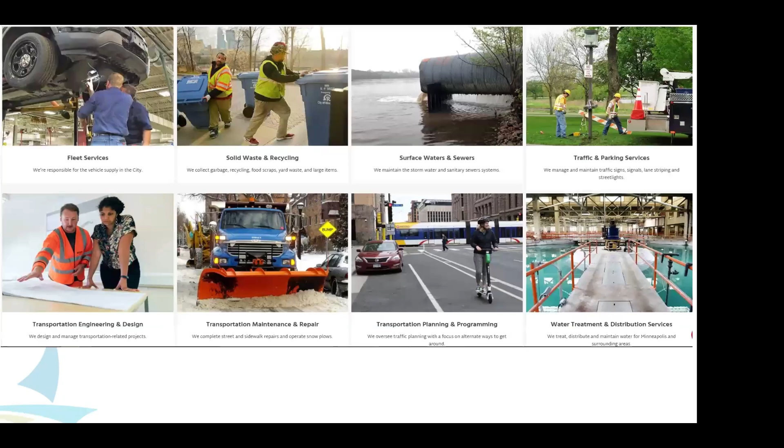Just a quick breakdown here visually of the 8 departments we have. I mentioned fleet services, so all the vehicles we need to do our job and provide service in the city - we have a group that maintains and purchases vehicles for us, that does all the oil changes and routine maintenance to make sure that we can operate.

Second, we have solid waste recycling. We want to keep our city clean, so we have trash services that the city provides for residents to pick up their garbage, and recycling as well.

We have surface water and sewers. I mentioned we have a lot of beautiful lakes and rivers here in the city, so we want to maintain our rivers by controlling the water when it rains, and make sure we clean it before it gets into our lakes and rivers.

Traffic and parking services - all the traffic signals, lighting, and all the parking signs out in the road, they maintain that.

Next is transportation engineering design. This is my division where I work. I am a design engineer, so I design the plans and also manage construction. This is where we do all the engineering in the public works department.

Transportation maintenance repair - this is one of the most important divisions. This is where they maintain the streets and all the infrastructure. When it snows - and Minneapolis, Minnesota is a very cold state, it snows half the year - they do all the snow plowing, street maintenance, street sweeping, and make sure the sidewalks are clear of snow and dirt.

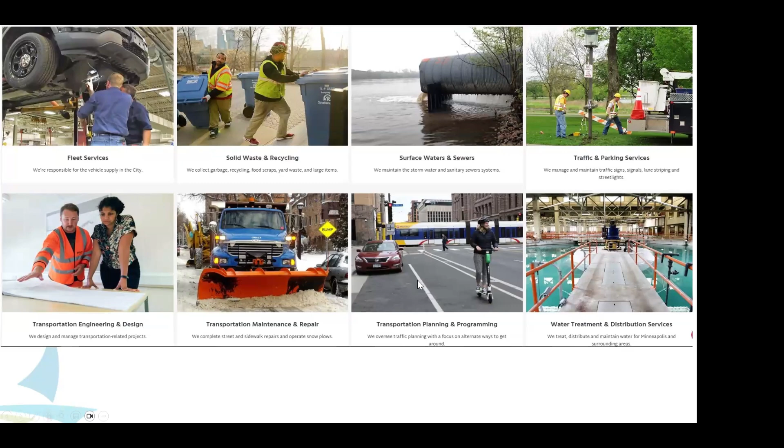And finally, water treatment. So our water department cleans all the drinking water in the city of Minneapolis. We have 2 treatment plants and a wastewater treatment plant as well in the city, where they clean the water and also distribute it throughout the city.

Okay, first important topic for any city or organization is a long-term vision. If you don't have a long-term vision, your city will not be successful. In Minneapolis, we have a lot of policy documents that we look into the future with to kind of see what the city will look like, or how we want the city to look in the future. And these policies help guide our planning, our design, everything at the city.

We look at these documents in terms of vision and how to implement change at the City of Minneapolis Public Works. For example, we have our Minneapolis 2040 plan. We're looking out - this was started back in 2020, so we had a 20-year plan into the future for how the city will look in terms of streets, transit, parks, all the different things you want to improve about the city, how beautiful it is, and infrastructure.

So we have all these guiding documents to help us with the vision and how to improve the city long term. For me in particular, I use the street design guide. This is very important in terms of how you design streets, and also the requirements you need for engineering wise when you do your street project. So these are all different documents we use. I can provide links after the meeting if you're interested to read some of them. There's a lot of information here, and we don't have time today to get through all the documents.

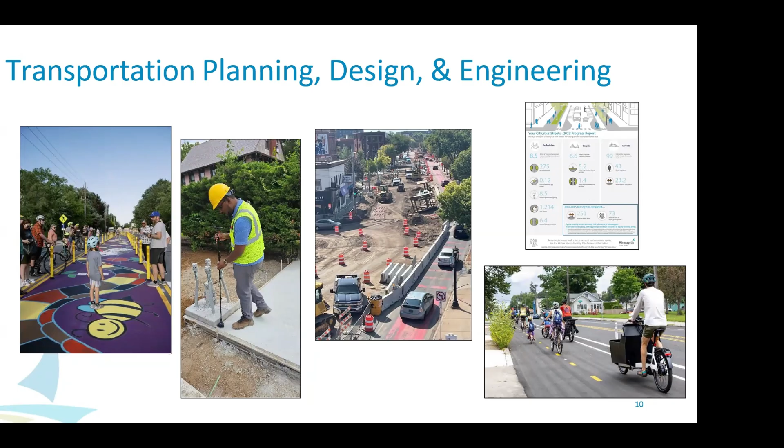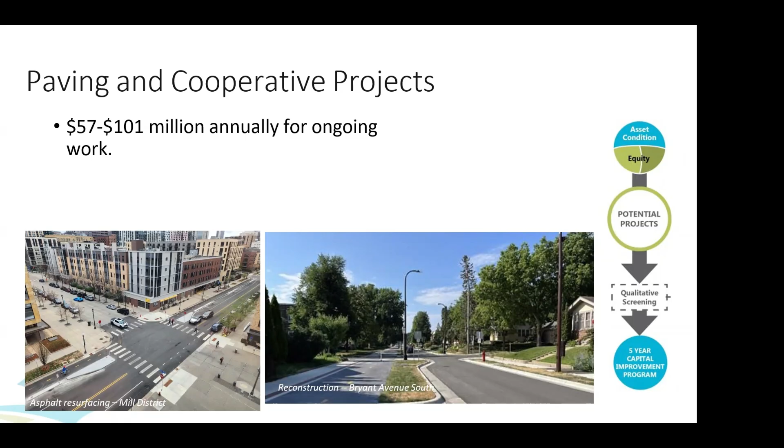So we have our paving project. My group does streets and roads, and every year we spend between $57 to $100 million in construction costs, building streets, sidewalks, and all different types of street projects.

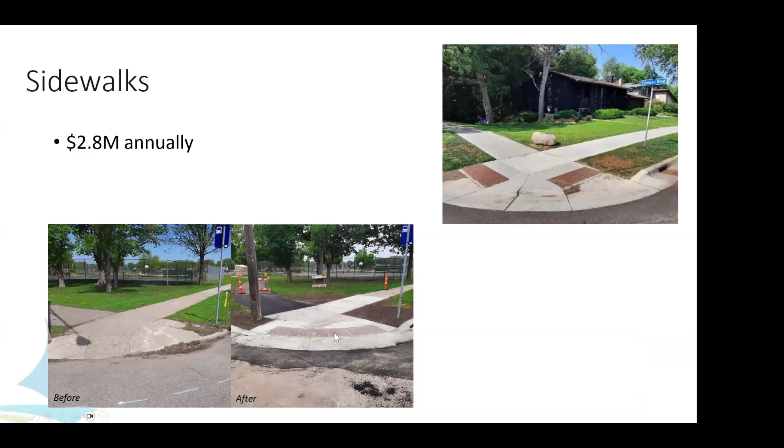And you can see the budget for the sidewalk for the next 5 years is pretty consistent, 2.8 million, for the next 5-6 years.

Bridges, we also have a bridge program. Minneapolis has 107 bridges that we maintain. So there's two things: we build new bridges, and we also do rehab, repairing existing bridges as well. If you add up the cost to build new bridges and maintain existing bridges, we're looking at almost $60 million every single year to maintain our bridges.

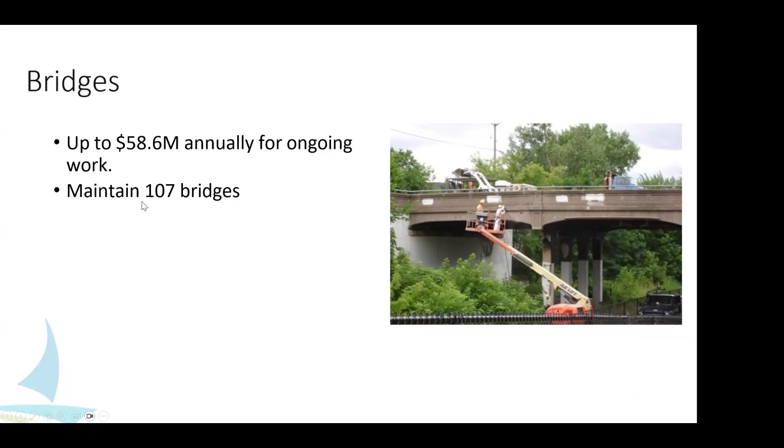Similar to the street program, we have a different type of bridge work we do every year, and we have a budget for each individual year. Let me go to the next slide here.

It depends on each year what's happening, so it's not always the same. Some years you might do more work, some years you do less work, based on the funding you have for that particular year.

Also, we have our traffic and street lighting program. This is very important - I mentioned we have 830 signals, you can see on the picture here in the city. We also have 50,000 lights that we maintain so people can walk and see when they're walking and driving along the city. That's a lot of infrastructure that we have to maintain every year.

We do a combination of putting new signals and new lights, also repairing existing lights as well. And that budget is roughly, depending on the year, $11 to $21 million every single year.

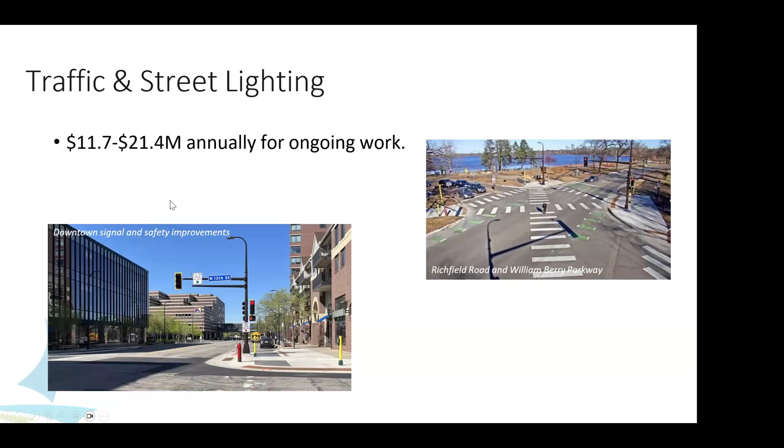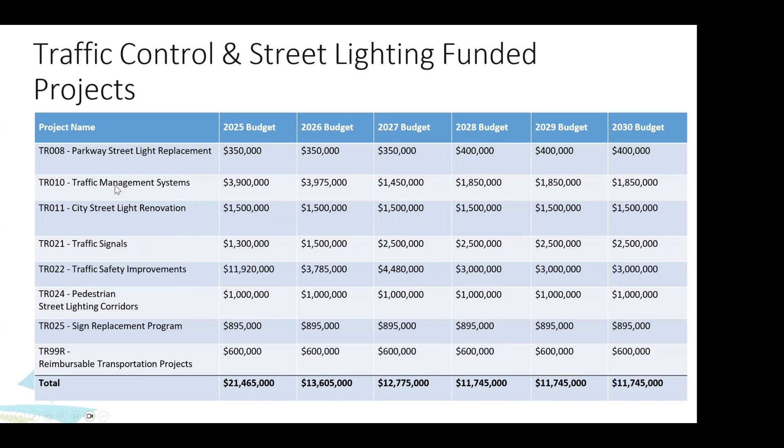Once again, same thing, we have a budget for our traffic and street lights. It goes from $21 million all the way to $12 million in the future. Everything is broken out - traffic signal, lights, traffic management systems - everything is organized and funded.

Next, I'll look into our utilities. Before I mentioned streets, bridges and traffic lights - now this is our underground systems, which is very important. We have 3 utilities at the City of Minneapolis that we maintain: sanitary, storm, and water.

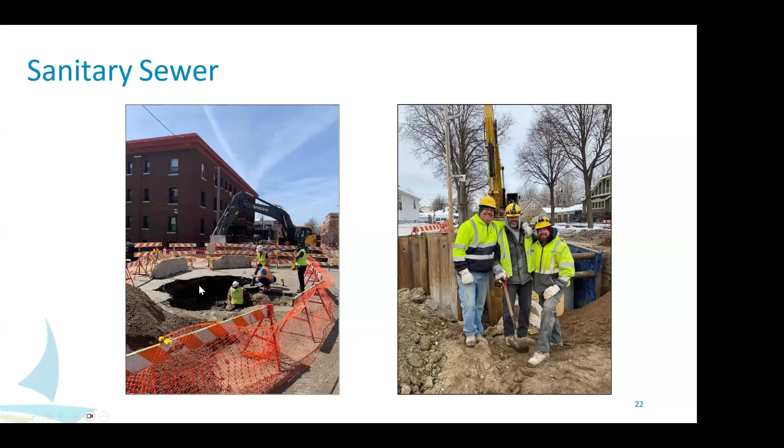Sanitary is all the sewer system that comes from the buildings and the homes. We collect from all the buildings and pipe it through pipe systems underneath the ground to our treatment plants. We have a wastewater treatment plant that collects all the sewer in the whole city and takes it to a facility to clean the dirty water. That involves a lot of maintenance as well.

Our sanitary sewer is roughly $17 to $22 million every year in terms of ongoing work that we do to maintain our infrastructure. As I mentioned, we collect and convey the wastewater to protect public health, because this is very important in terms of people's health and cleaning this dirty water.

There's a lot of infrastructure, and a lot of the infrastructure for our sanitary system is very old - some of them might be over 100 years old. As you can see in some of these pictures, they're in very poor condition. So every single year, we have to try to either completely upgrade it, put in new sanitary sewer and manholes, or try to line the existing ones to make sure it lasts longer.

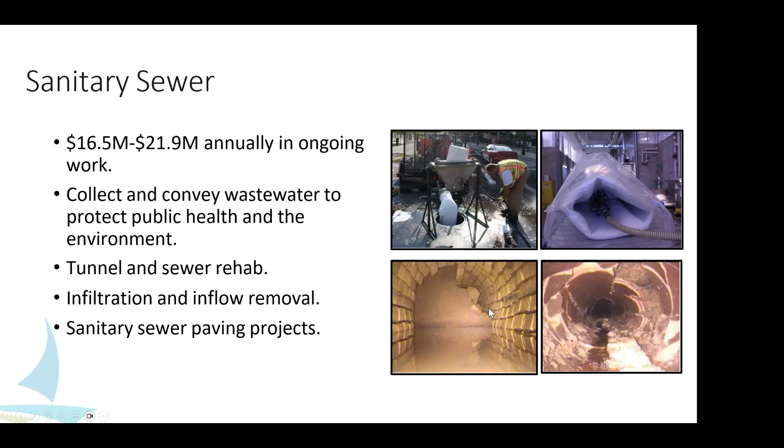Then same thing, you can see there's a theme happening here - we have a 5-year, 6-year budget every year for our sanitary sewer funds. The sanitary is a little different compared to street projects; we charge residents, people, the buildings, property owners a fee every year to provide the service, to collect their sewer.

Same thing for water - they pay for the water to drink it. But I'll talk more about that.

Storm sewer. So Minneapolis, we have a lot of beautiful lakes and creeks and a river. And when it rains, we have to make sure our roads are not flooded.

I was recently in Hargeisa. I've seen when it rains in Hargeisa and Borama, the streets flood a lot. In Minnesota, when it rains, you'll never see any flooding. Our streets are always, most of the time, clean. There's no standing water because we have very good infrastructure to collect the storm water when it rains, and we put it into our sewer system so that it does not flood the streets. And we take that water, and we try to clean it before we put it back into the lakes and rivers.

As I mentioned, we have different programs. We have a tunnel system that collects a lot of water. We have our drain systems. Long story short, we have roughly $20 million every year to maintain our storm sewer infrastructure to make sure we collect that water, treat it before it goes into the river and lake, and make sure the water quality is good, because when it rains, the water collects a lot of dirt and sediment, and we make sure to clean that sediment before it goes into the rivers and lakes.

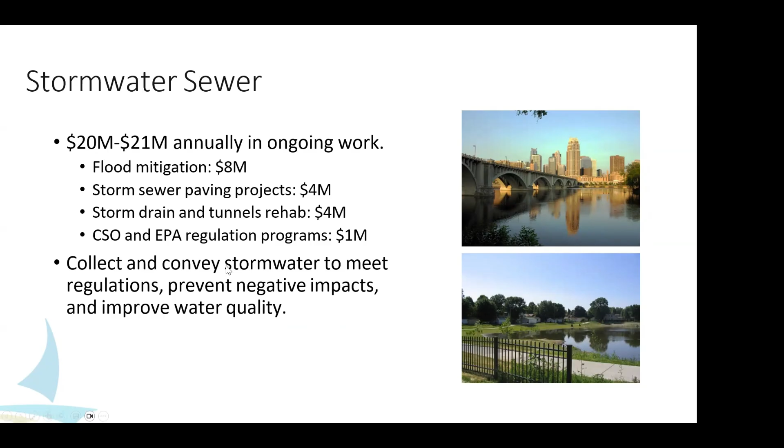Once again, we also have a 5-year budget for that as well. You can see every year it goes between $20 to $21 million in funding for that.

Lastly, for utilities is water. Minneapolis, this year the state of Minnesota did a survey. They said Minneapolis has the best tasting water. Our water is the best tasting, man. We do a very good job of cleaning the water and also distributing it to our residents and customers.

So there's two aspects to water treatment. One is drinking water that we provide. Also, we provide water for example to hydrants, so when there's a fire, the fire department can use the water for emergency purposes. This picture here is Somali students that came to the water treatment facility. We gave them a little tour of our site and how we treat the water. So we take very dirty water and we make it into very clean drinkable water.

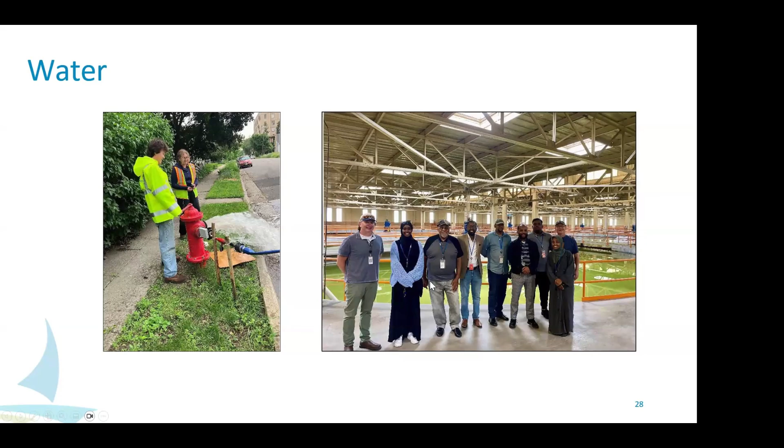I think this is one of the most important departments at the City of Minneapolis: public health. People need clean water to drink and to use for a lot of different purposes. We have a pretty important budget for this, $27 to $41 million every year to maintain our water and our distribution system at the City of Minneapolis. And we provide drinking water to over 500,000 residents in Minneapolis, as well as some adjacent cities.

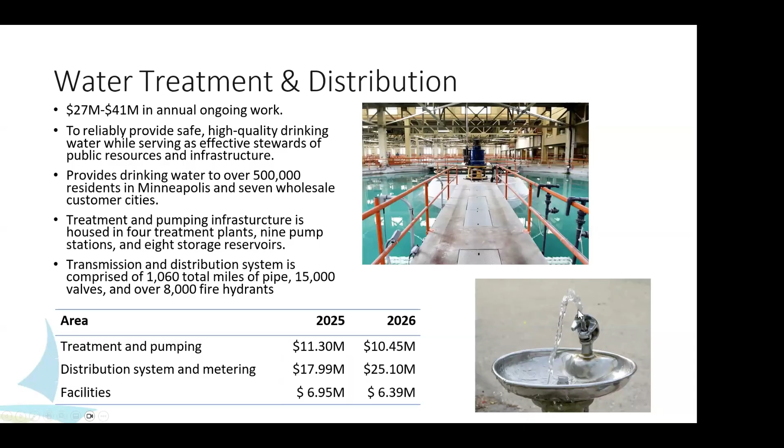This is another picture of our treatment plant here. You can see the water is being cleaned in this big tank here. And here's a little water fountain that we have as well.

Water fund, same exact thing. We have a 5-6 year plan to invest. Let me go to the next slide here. Over the 5-year plan, our budget ranges from $36 million to $41 million every year.

Fleet services. So in order to do our work, as I mentioned, we have a lot of equipment. You can see here large trucks, pickup trucks, and a lot of different equipment that we need to do our work. We have a division that's only responsible for maintaining it: the oil changes, buying new vehicles. If the vehicles break down, we have a big mechanic shop at the city that fixes all the trucks and cars for the City of Minneapolis.

So we have another department, same thing, they also have a budget. Every year they have between $1 million and $5 million to maintain our equipment.

And then I think there's the last department, transportation. This is a very important department, because Minneapolis has thousands of kilometers of streets and infrastructure. Also, half the year it snows, and in the other half we have a lot of breakdown of our streets, because you can't rebuild all the streets every year. So a lot of streets are in bad condition. So we have our transportation maintenance repair department. They do several things.

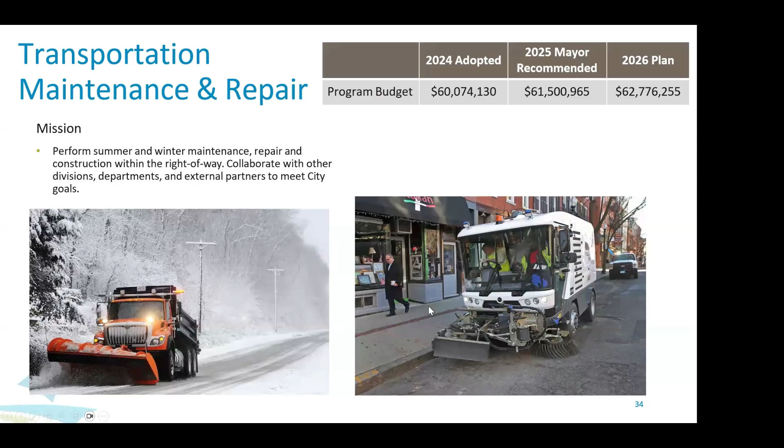In the wintertime, they plow all the streets, all 4,000 kilometers of streets. They remove all the snow with these big trucks. They also use a lot of salt to melt the ice and clean the roads so we can drive safely in the city. In the summer and springtime, they do street sweeping. You can see these big trucks clean the streets from all the trash and dirt on the streets, making sure our streets and sidewalks are clean and presentable.

Also, they fix potholes. If there's any issues with street damage, they come out and pour asphalt to fill up any holes in the street. They also do repair jobs - if anything fails, we have concrete and asphalt crews that build streets if there's a need for that. Also, they do seal coating, which is surface treatment of the asphalt to give it a longer lifetime.

So this is a very big division. My friend, his name is Ahmed Omar, he's the manager of this division. He manages all the work here. He's a Somali brother, manages work here.

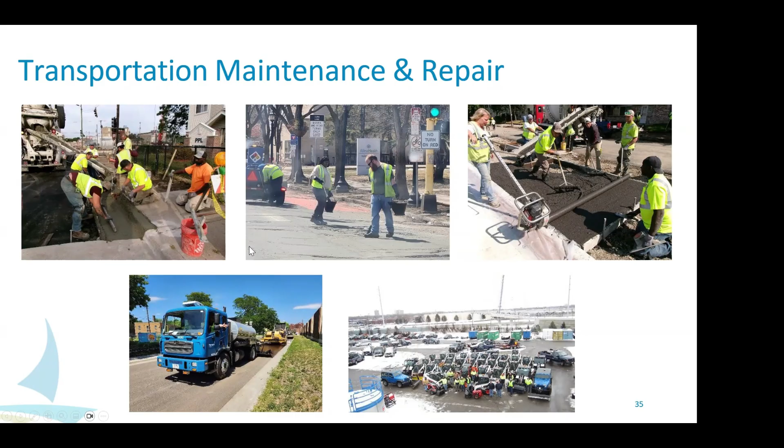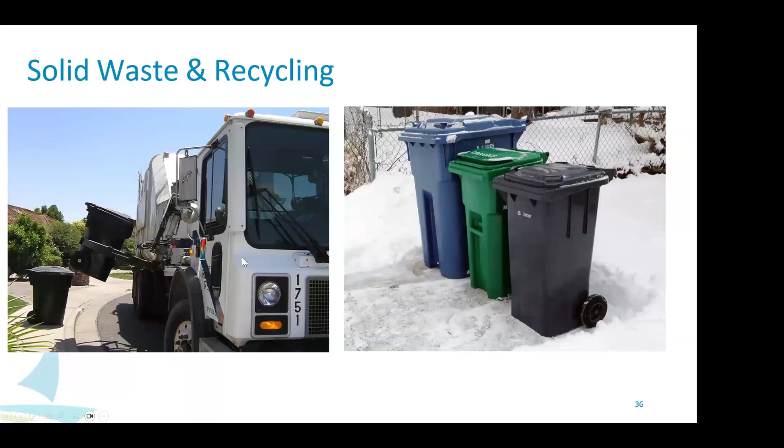And then the last one is solid waste recycling. This one picks up all the trash in the city of Minneapolis. They do a lot of good work too here. They have a budget too - their budget is like $50 million a year to pick up all the trash in the city.

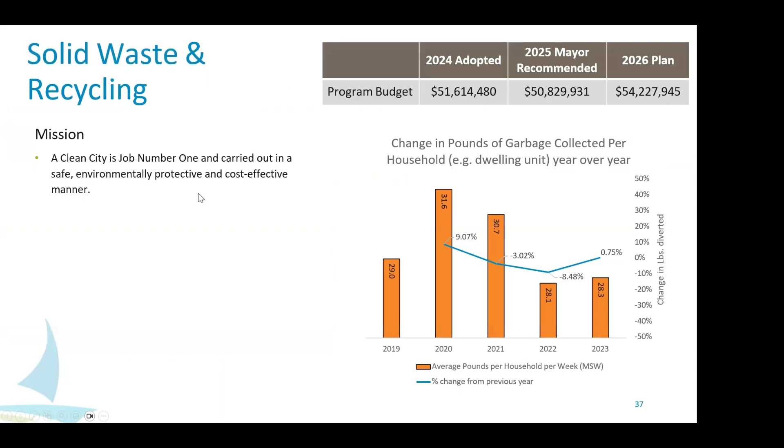Okay, and the next topic is engineering standards and engineering licensure. Any city has to have qualified people that need to do the work, whether it's engineering, planning, or maintenance - there has to be some sort of standard. Because if there's no standards, then the quality is in question. It might be good or bad, you can't guarantee that, especially since a lot of taxpayers in the city pay taxes and want to make sure that what they're paying for, they're getting quality service. So in order to provide quality service for our customers that live and work in Minneapolis, we have to follow certain standards.

In Minneapolis, especially for our engineering department, we have different administrations. For example, Minneapolis has our own engineering standards. We also have the State of Minnesota, which has a Department of Transportation with their own rules we have to follow. And then also the federal government has their own Department of Transportation, the Federal Highway Administration, with all their rules. There are a lot of standards, specifications, and rules we have to follow to do the work.

You can't just build or design a street or a bridge without following all the necessary design specifications and standards. On top of that, as an engineer, I also took a license exam. I'm a licensed professional engineer, so I cannot do any design or work without having a license. You have to first work as an engineer in training for 4 years, then take a test in time to be licensed as a professional engineer in order to do this important work. Because for example, with a bridge, if you don't design it appropriately and correctly, a lot of people can die if the bridge fails or collapses.